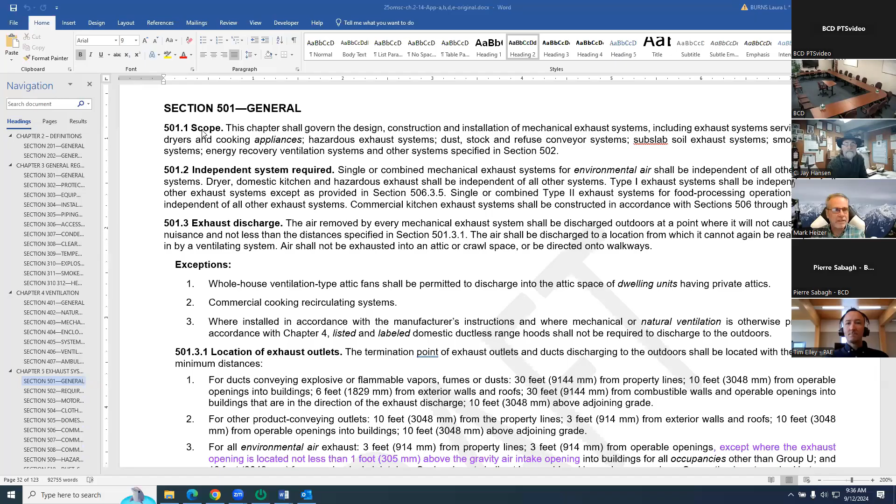Yeah, Mark, and this is Tim here. I was the one that mentioned it.

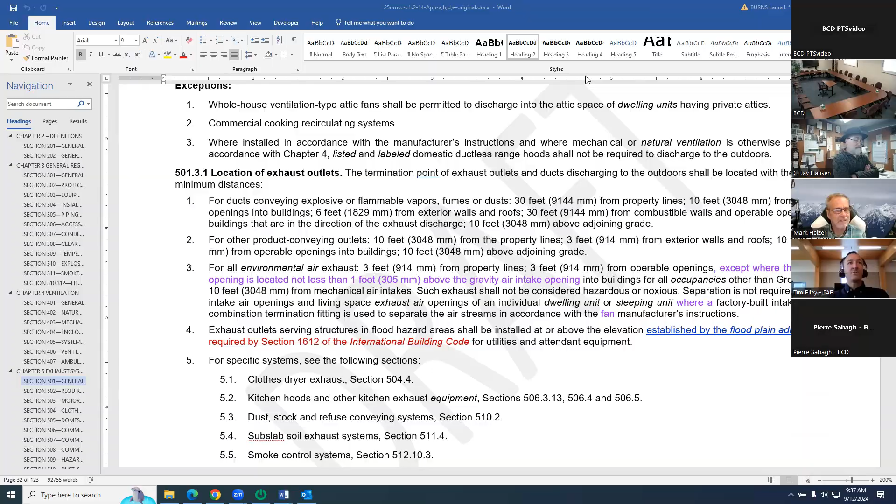I have a kind of a small proposed edit here for consideration. I can either share my screen or tell you what it would be. It's a slight addition to number 3 under 501.3.1. Yes, go for it. Go ahead.

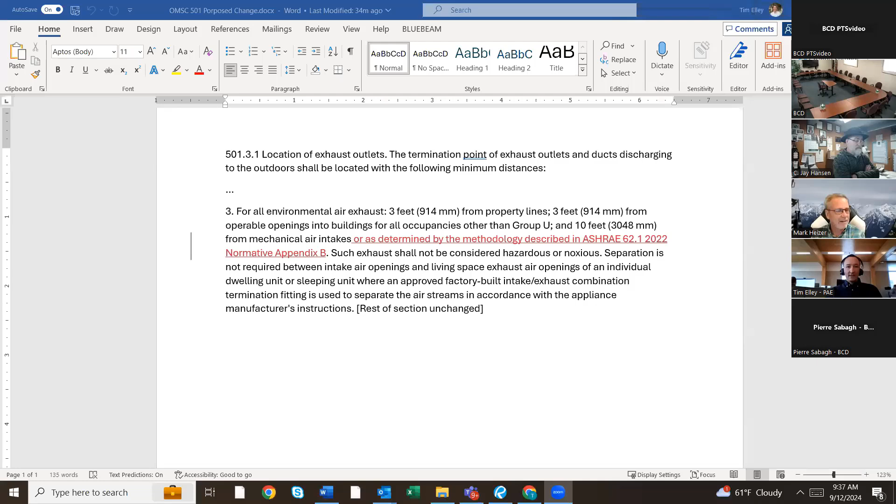So this would be clarifying here for all environmental air exhausts, 3 feet from property lines, 3 feet from operable openings, 10 feet from mechanical air intakes, or as determined by the methodology described in ASHRAE 62.1 2022 normative appendix B, which is a calculation method to determine the separation distance required based on velocity.

So that would apply only to environmental air. But I believe that's generally considered an acceptable alternative method, though it's not called out explicitly. Correct me if you know otherwise.

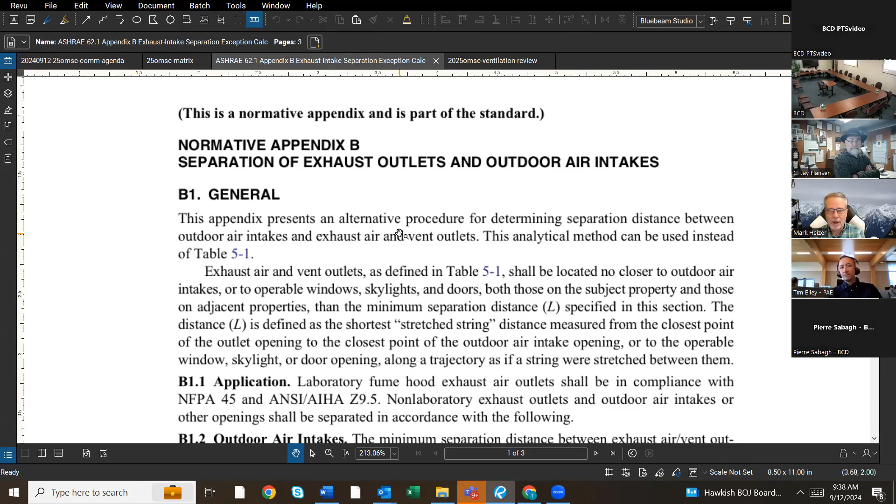And I can share that. It's not called out explicitly, and I'll do a quick word search. So when there are items in chapter 4 specifically related to 62.1, it's only mentioned really once. And so while it's still allowed under, when you get to some of the methodologies, having this noted specifically in code would probably be good - it would show that it's a known accepted methodology, I guess. Having it more specifically noted for this would probably assist.

But leave that up to the committee. Mark, I guess I'd add I don't have strong feelings about it. This is my first code review committee, so I don't consider myself the authority on whether or not things should be called out explicitly, whether and where. But it's something that's come up for me in the past, so thought I'd mention it. But I have no strong feelings, so I'll leave it at that.

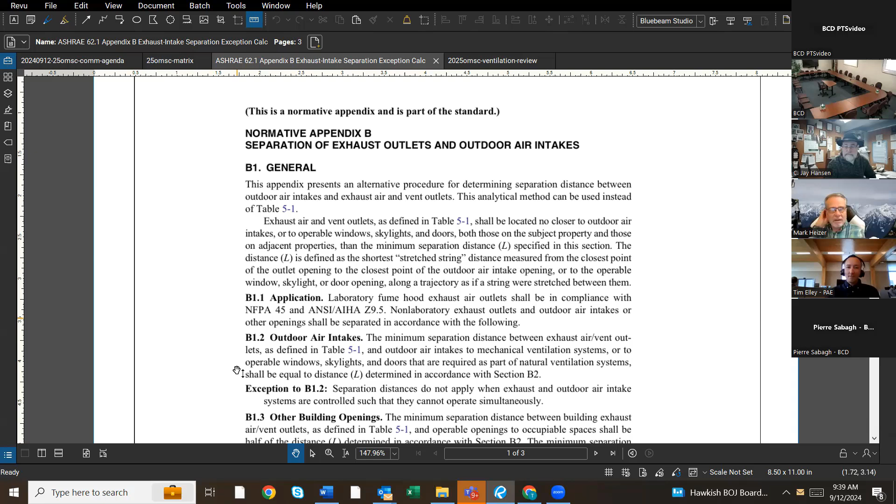In the past, in some past editions for mechanical ventilation, old code would sometimes say under the I-code methodology or the use of 62.1 was always allowed. Indirectly, it's always allowed, but this would, from our standpoint, provide a little extra flexibility without having to go through an appeal process or additional items for doing what is an accepted and well-respected methodology for discharge of, yes again, environmental air.

This could be whether it's just from bathroom exhaust, general ventilation exhaust, residential range hoods, and a few other items considered environmental air. So this wouldn't be any air that's hazardous, and this would allow it to be closer to a mechanical intake.

Especially applicable to multifamily, maybe in cases where you're not literally using the concentric intake and exhaust, but have some other solution. The concentric being the already allowed factory built intake exhaust combination termination fitting.

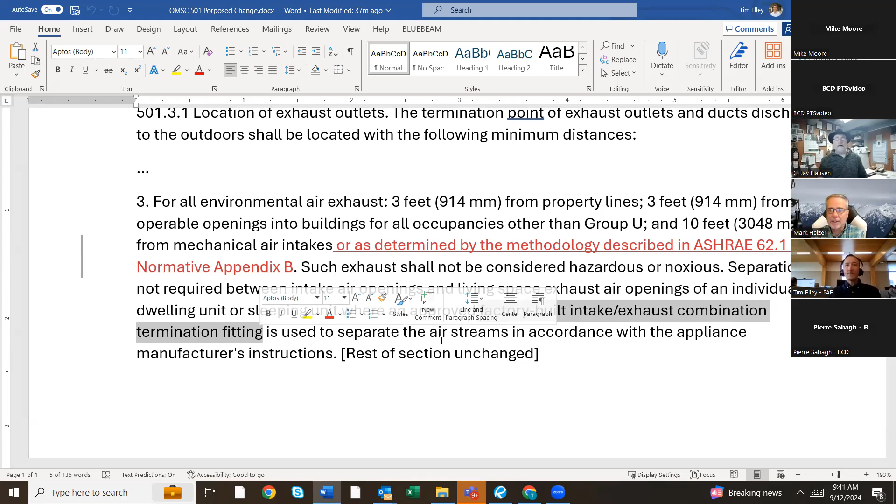Yes, let's go back here to - just as long as there's a definition of it. So environmental air is that conveyed to or from occupied areas through ducts that are not part of the heating or air conditioning system, such as ventilation for human usage, domestic range exhaust, bathroom exhaust, clothes dryer exhaust, and parking garage exhaust. So it's not any of the hazardous materials. It's basically general space air being exhausted or used.

Mark, is it a decision we need to make now, or can it just go down as a proposal and get decided another time? It's up for discussion today. Let's see here, we can get input from committee members.

Let's see here. Kevin? Or Kevin, you're on this, or I'm trying to remember all our committee. Yeah, I'm not on the committee, but I'm on the board. But I just wanted to say, I think Tim's proposal is great.

So we have to be cognizant of time and so forth. But yes, I'm seeing one other comment, and we'll get this through. Then the remainder will need to be from the committee.

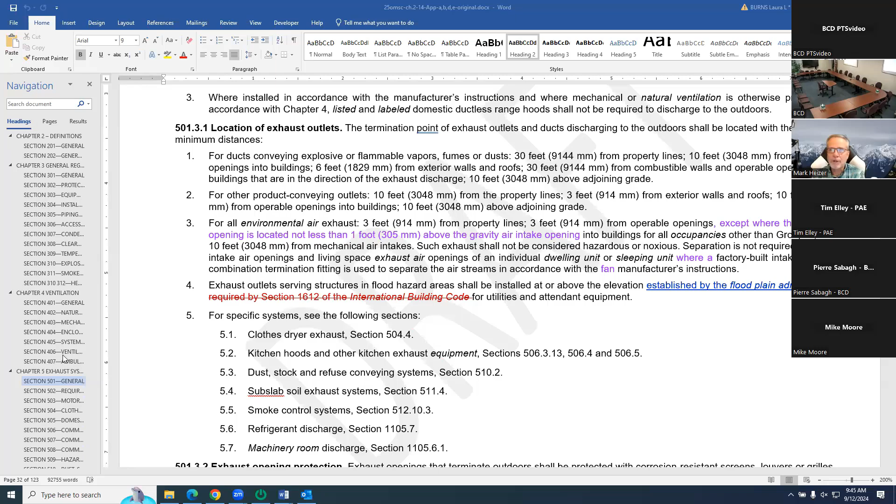Oh okay, we're going back to, as part of our incorporation of the construction provisions of the fire code, the safety items that are required when you have a stove in some of the I occupancies.

So when there's a stove, the basic requirement is that you need a UL 300A type range hood, which has some minimum integrated fire protection in it. It also has the ability to cut power to the cooking appliance.

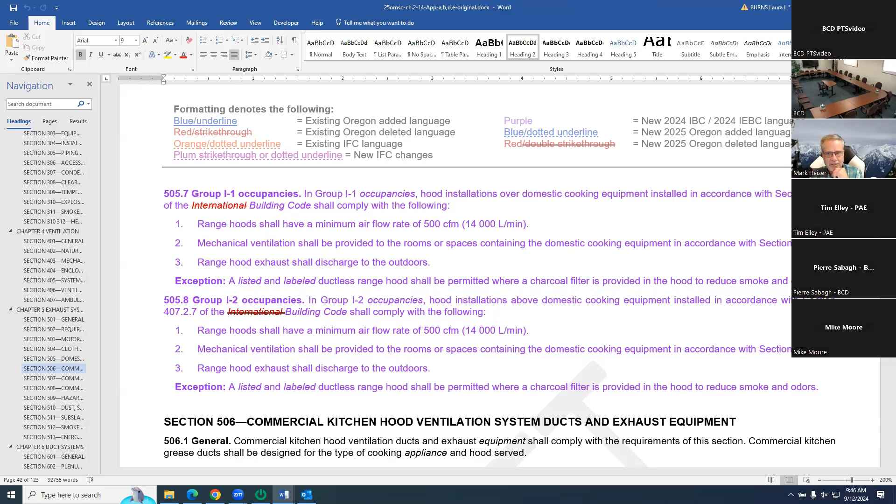This was in the code in the last code cycle and has been effectively for some time. But what we wanted to make sure is the one item in this change where they're being more explicit about it is that the use of range hoods does have a minimum airflow associated with it of 500 CFM.

And just wanted to get one last note from the group that that isn't in the current code, having a specific CFM of exhaust from range hoods in these I occupancies.

And just one more time going through the group, if they're doing this, there's a potential cost increase involved if some of these UL 300A units were under 500 CFM. So it also potentially would have impacts on even more potential makeup air.

Bringing this up for discussion just one last time to say, go forward as in model code with adding this new requirement for a minimum CFM on the unit, and just with a note that there is a fiscal impact. Wanted to allow people a little extra time to mull that one over last week.

Thanks, Mark. I wouldn't say I have any reason to differ from the model code on this one, Mike. So that's my personal opinion. I don't have a reason.

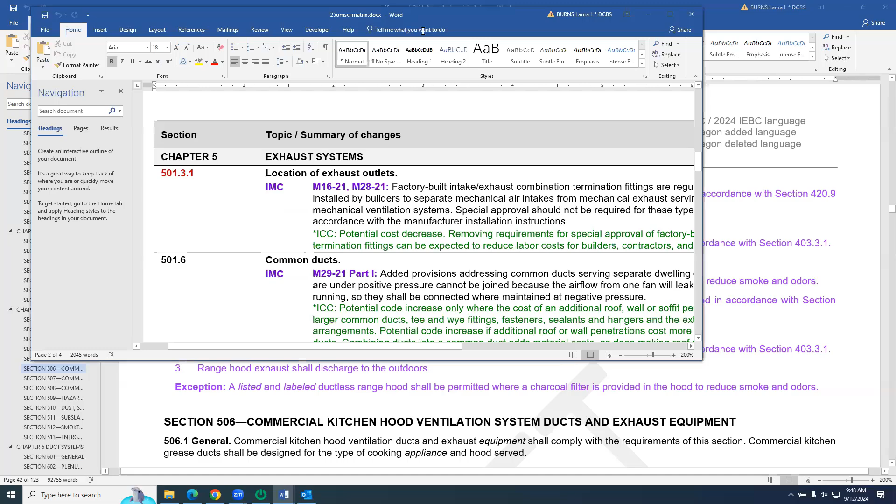Last, going back to our review item, let's get refrigeration piping and shafts out of the way in 11 first, and then we'll go back to ventilation to get that done.

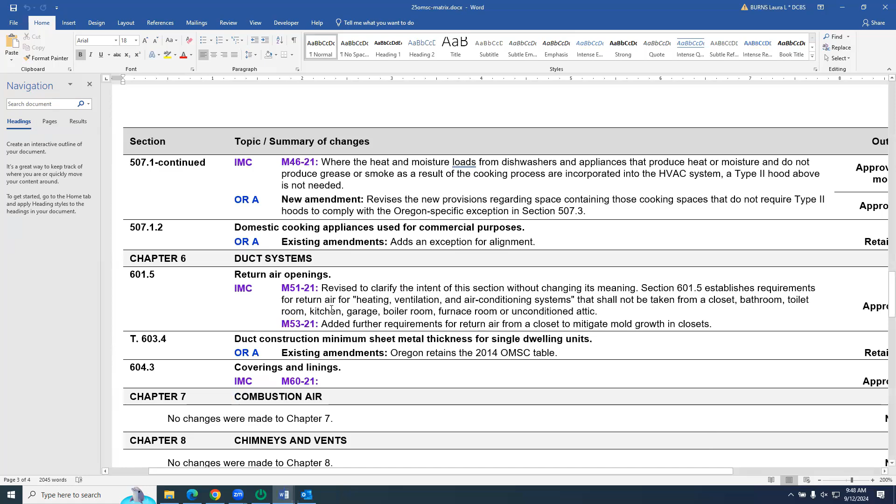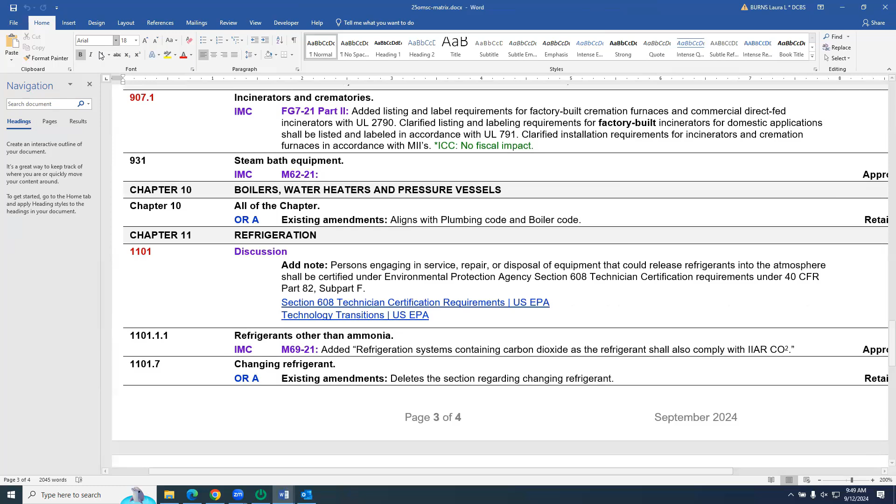Okay, let's go to... Oh, excuse me, the 11 is not the refrigeration and shafts. It's the new informative note that we're putting in, just to run this by everyone.

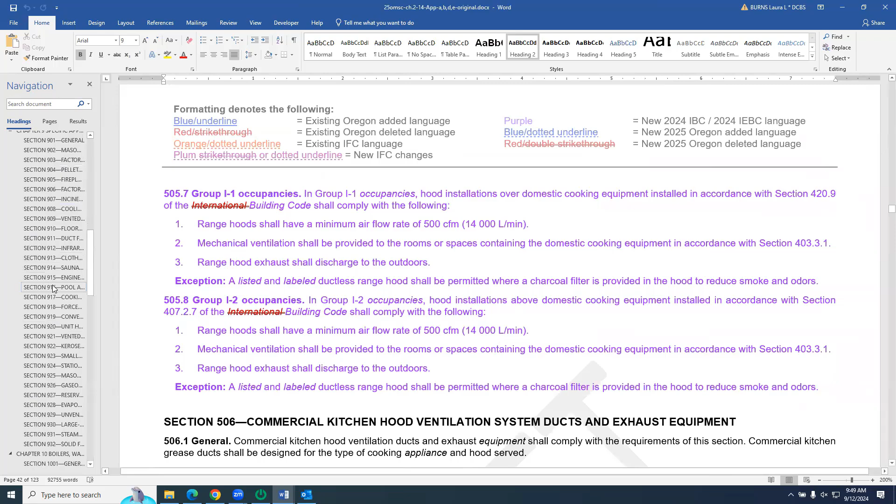I want to show, to remind people of what an informative note is, that we do have when other regulations might be applicable to the code, they're set by other people.

We wanted to note that there are requirements for refrigeration repair technicians that are outside the code, but it's sort of noting some of these environmental issues that are out there. We make notes about DEQ requirements, Oregon and federal DEQ requirements for wood stoves.

Just felt that letting people know that we're going to have this informative note and get feedback about service technicians, especially now that we're seeing a lot of work on changing the refrigerants that are required. Just note this is not code, but a recognition and informative that service techs need the EPA certs for doing work. And just want to get a little feedback, especially from the contractors in the group.

This is something that the division normally puts in, but just bringing it out for awareness to the group.

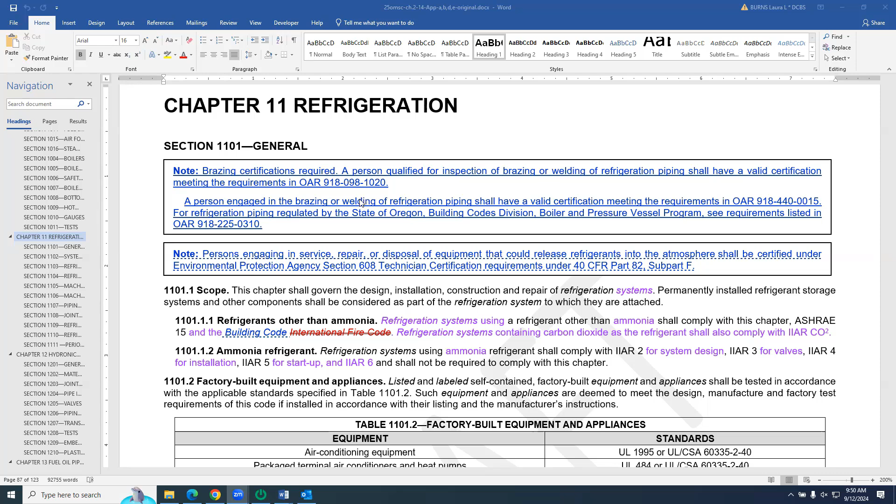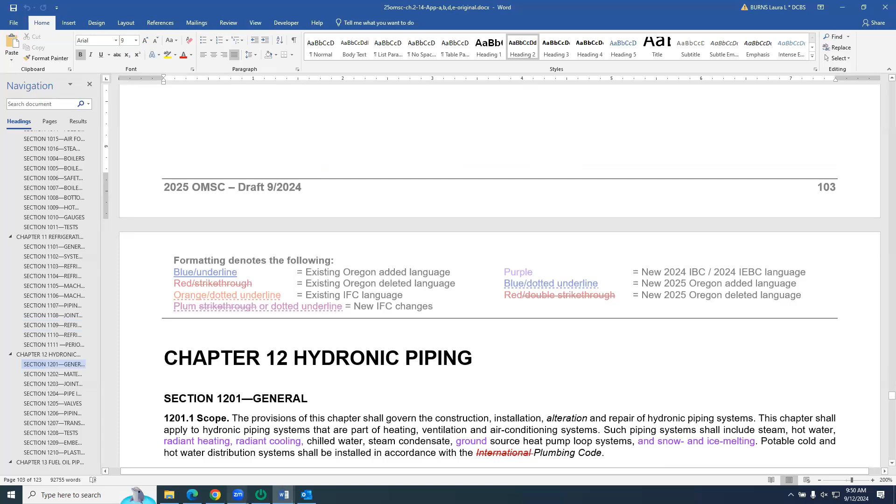And since we did have on here about refrigerant piping and shafts, I believe that was approved last time, but for some reason I had a note about that to continue to note and actually show the language change that's being put forward, which is, and we had that. You showed the strikeout just a second ago.

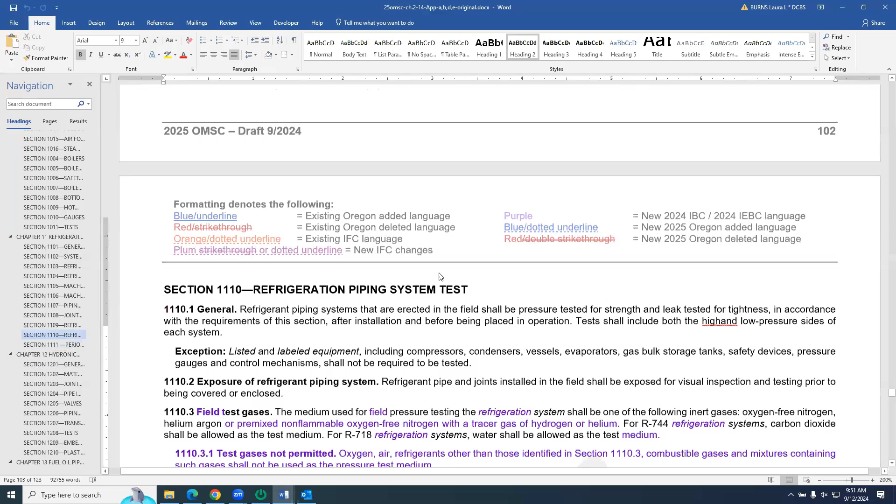This was a recommendation in 1109.2.5, and it is catching up with what is in the ASHRAE refrigeration standard and is going to go into the 2027 code.

Striking out, as we see in exception number 2 here, using group A1 refrigerant. Any refrigerant that is above the MAQ limits and requiring refrigeration will need the...

Doesn't need to be in a shaft, and actually could be a 1 hour or even a 2 hour shaft. So if the piping is allowed to be in the building, and is in a safe quantity to where it doesn't present a hazard and fall under the maximum limits under the tables, this is just noting that.

Unfortunately, because of all the new refrigerants coming out, limiting that exception just to A1 refrigerants was going to be a big cost impact unless that was modified. Just putting that forward to the group to let you know about, and to actually show what the language would look like in our code and will look like in the 2027 IMC.

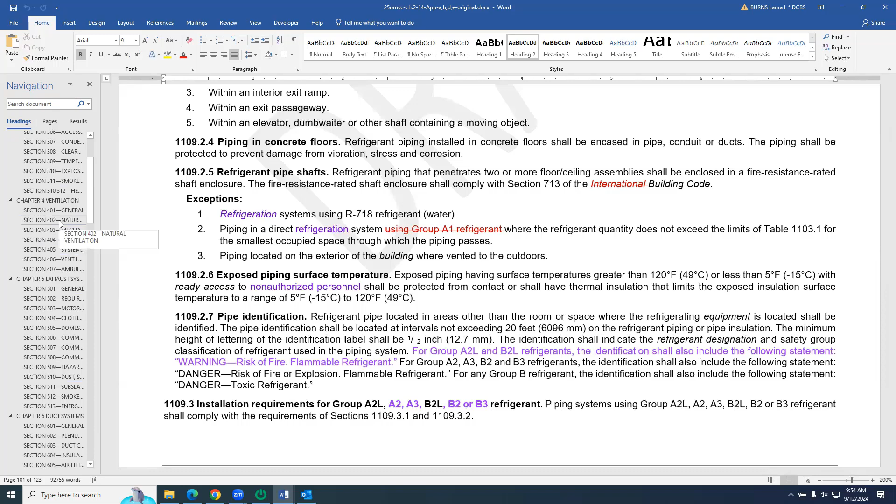So beginning with 401.2, previously, model code language says, if you're complying with the energy code and the leakage requirements, which we require, dwelling units are required to have mechanical ventilation in accordance with section 403. That's sort of our starting point.

That's just clarifying to standard to align with code language. What we need to do is go to 403.1 and show some of the model code changes, and one that was missed in the public document that we'll go through. But if we can go down to 403.1.

Oh, Laura, are you looking for me to talk about also the exception here? We had published, while we're in 401.2, the exception that's being shown here about the way the language worked for the differences between what's in...

403.2 dwelling units under 4 stories and dwelling units above 4 stories. We wanted to make sure that no one got out of having to actually ventilate a shower or bathtub room in a private dwelling. There was actually potentially an out the way our code was currently written. So that's the reason for the red line. You see they're deleting that exception. There's no need to have that in this code cycle.

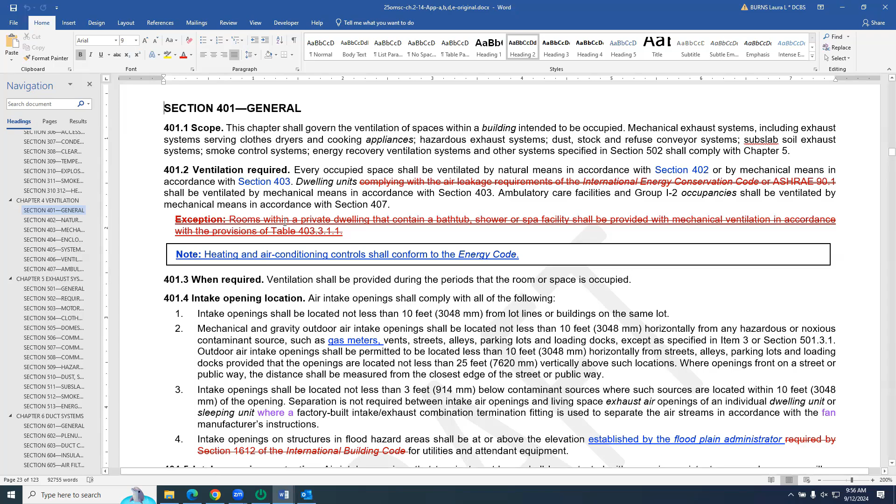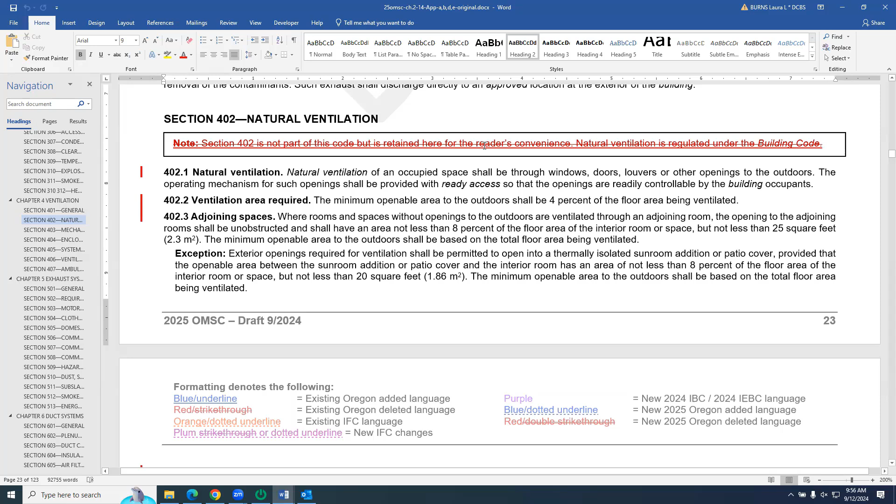So we will go down to, also, we're here that, quote, natural ventilation, as we had noted earlier, has been brought in to the mechanical code. The folks at the building code side said, look, just put all ventilation, whether natural or mechanical, over in the mechanical code instead of having it in different locations. They're recognizing that decisions will all be made over here by the mechanical design team. So that's why the informative note was struck.

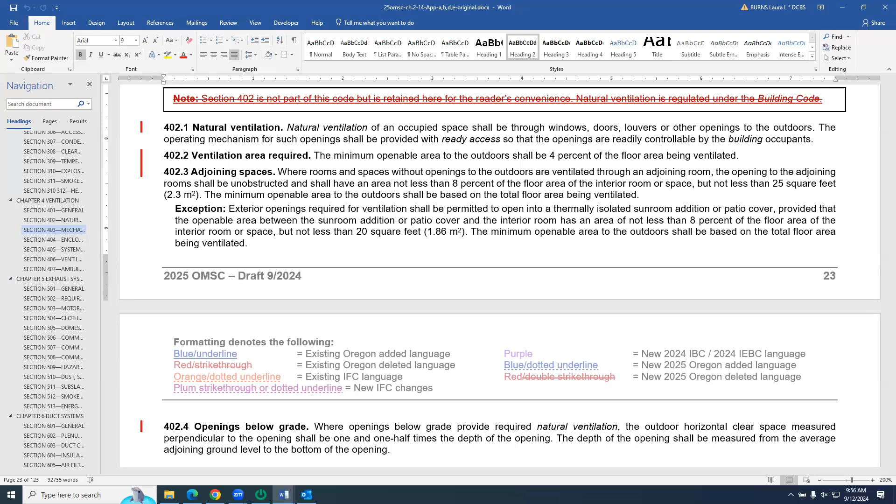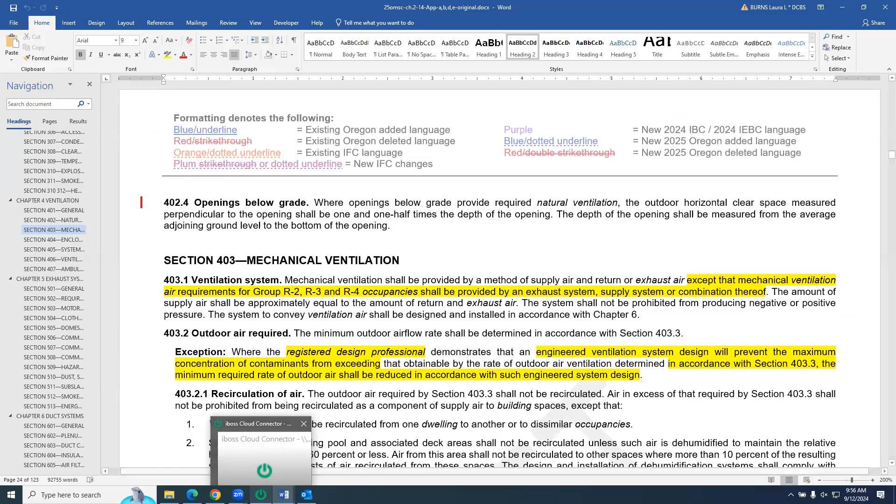Let's come down here. Mark, do you want to go over, I sent all of the committee members the document. Yeah, so we have sent out just some general guidelines for discussion of what is going on, what's changed, what's happening at national level, local level, the things that we've done here in Oregon for our discussion today. I don't know if everybody's had a chance to look at it or not. I'm bringing up my copy.

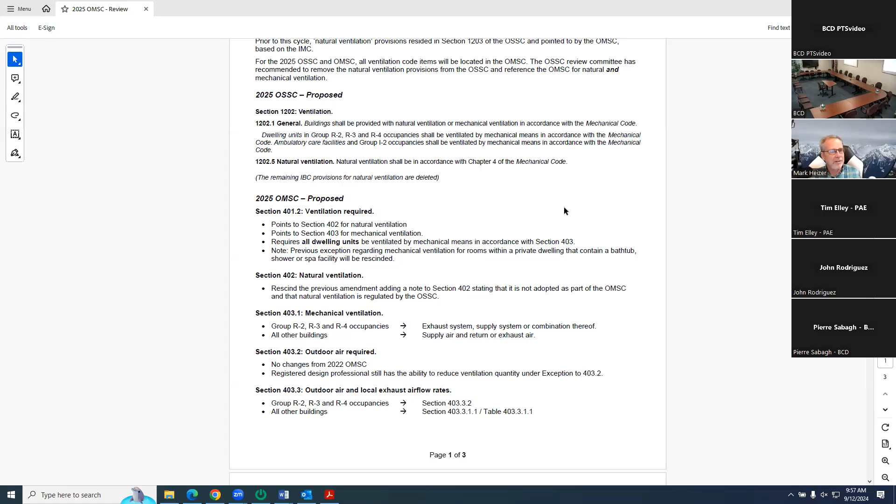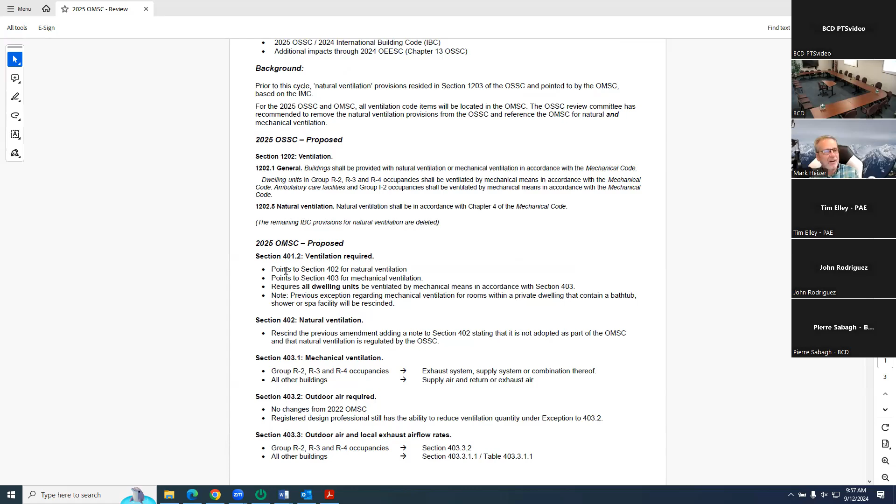There were a list of general questions for everyone to potentially go through, looking at the, yeah, here it is. Laura brought it up. Thank you for first showing what happened at the model code, or excuse me, at the building code side of moving natural ventilation over to...

1202 is being moved to where natural ventilation is being done over, so natural and mechanical ventilation are all being done by the mechanical code. So that is what the Oregon Structural Specialty Code has done, also noting that dwelling units in R2, 3, and 4 occupancies need to be ventilated by mechanical means. And that ambulatory facilities and I2 occupancies need to be mechanically ventilated as well in accordance with the mechanical code. So they're clarifying on their side that they need to know who does what ventilation, where, and how.

So moving over to our code, we're going down through the list, section 401.2, ventilation required.

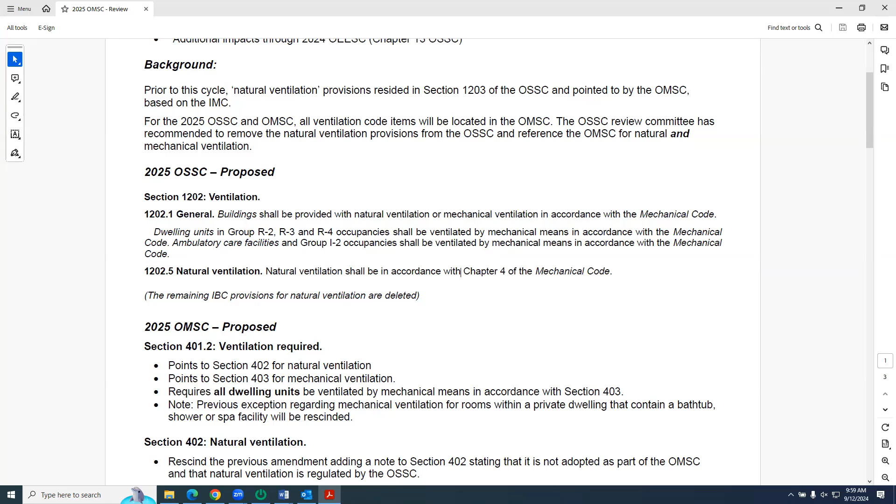402 is now officially in the mechanical code once again about natural ventilation, no modifications to that section. 403 is for mechanical ventilation, and it requires that all dwelling units are ventilated by mechanical means in accordance with section 403. We're getting rid of our exception pointing out that bathrooms have to be ventilated. That's now covered between the tables.

Section 402, we're rescinding that previous amendment that said the mechanical code didn't cover natural ventilation. It is now in the mechanical code. Then in 403.1, we're going through R2, R3, and 4 occupancies. Exhaust ventilation, supply, system, or combination thereof is allowed under model code and has been in our code.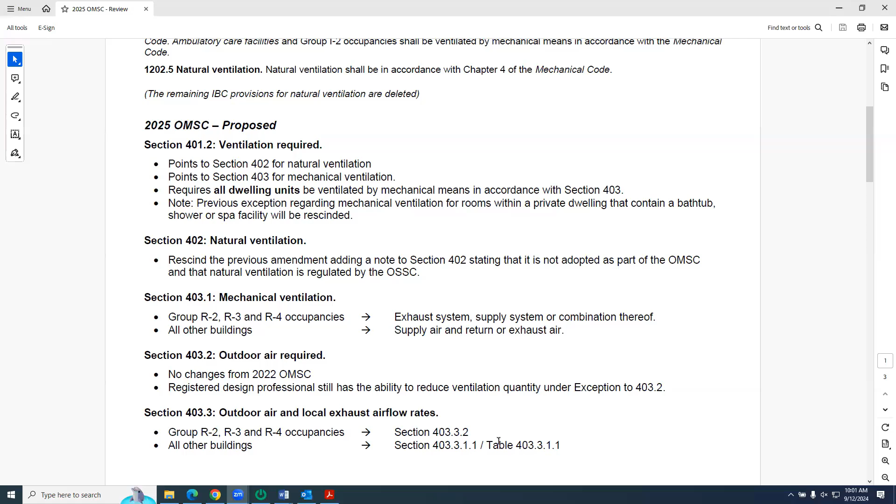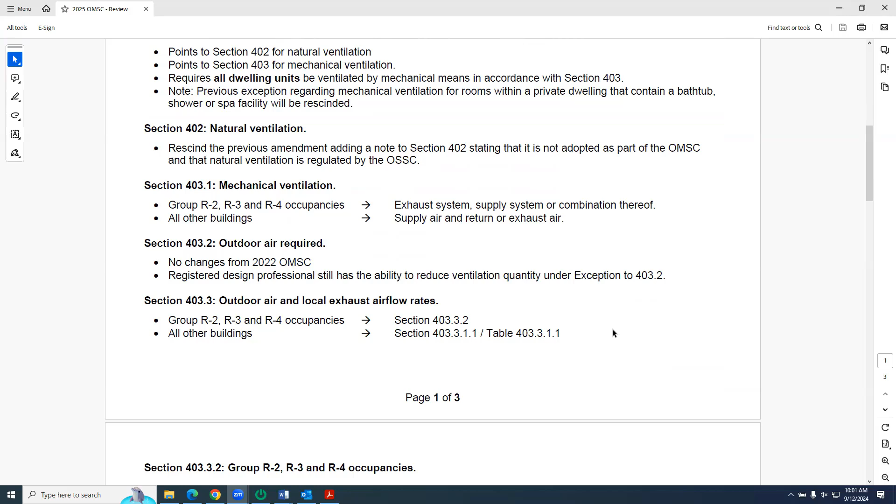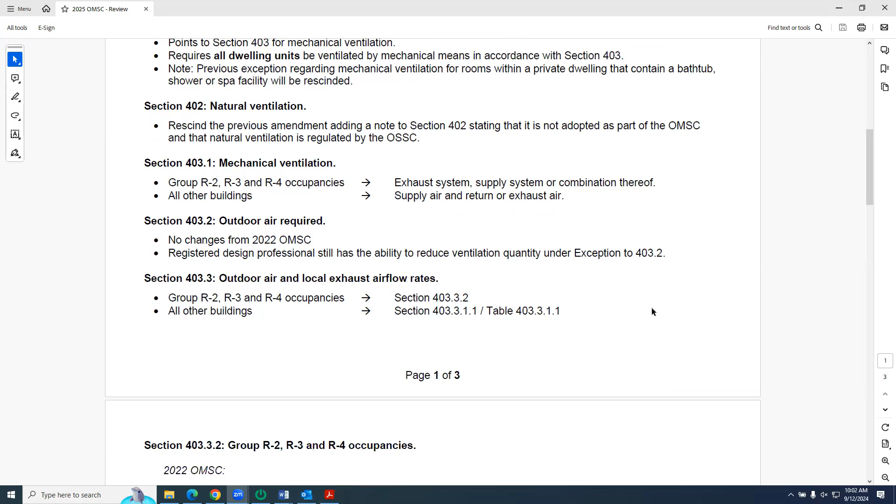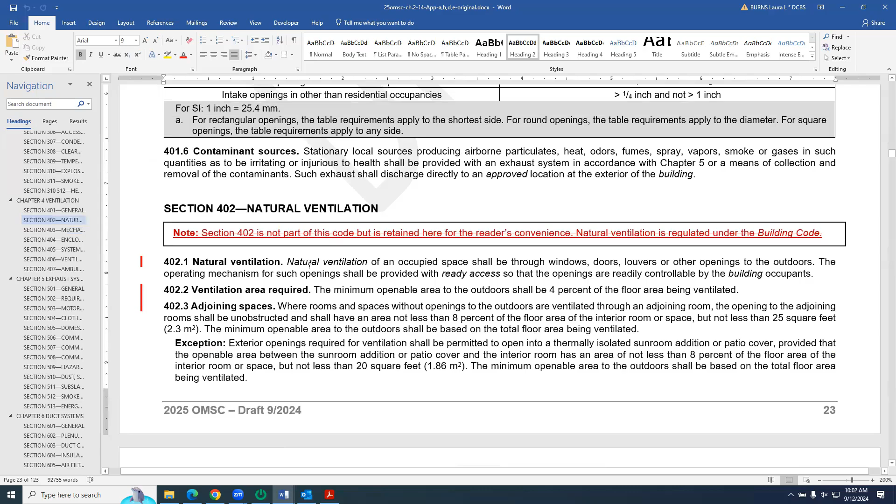If you're in other buildings, you're using 403.3.1.1, and the complexity when you get into multi-zone systems and the like. But dwelling units, really, if you're an apartment or condominium, or if you're a dwelling unit, you are in this section 403.3.2, and then we'll go over the Oregon changes on that and discuss what happened at model code as well with this modification. This is simplifying application. The good part is it's simplifying the application for any dwelling unit in those occupancies. You're not going to a different methodology when you're in a high-rise building versus 3 stories or 2 stories of residential over 1 story of commercial. So it makes it a lot easier to work on that.

So under 403.3 at model code language, they fixed the strikeout of Group R2, R3, and you see 403.3, Group R2, 3, and 4 occupancies, 3 stories and less in height above grade plane has been struck. This will now be for all of those. You go to section 403.3.2. That will be errata. It should be errata in the IMC when they come out with it, because they didn't like that in 403.3. So let's go to

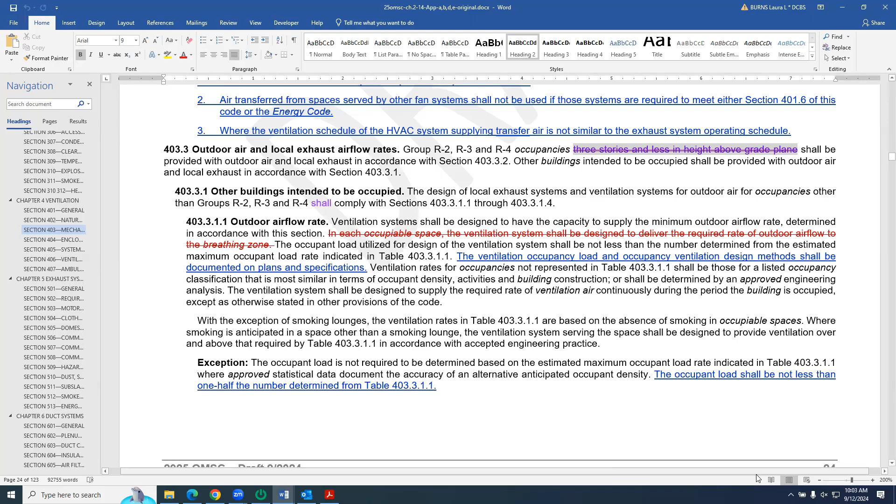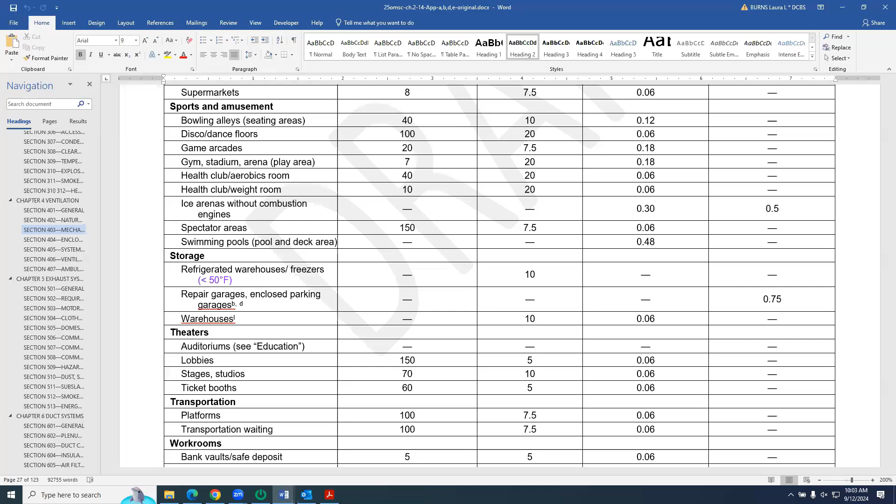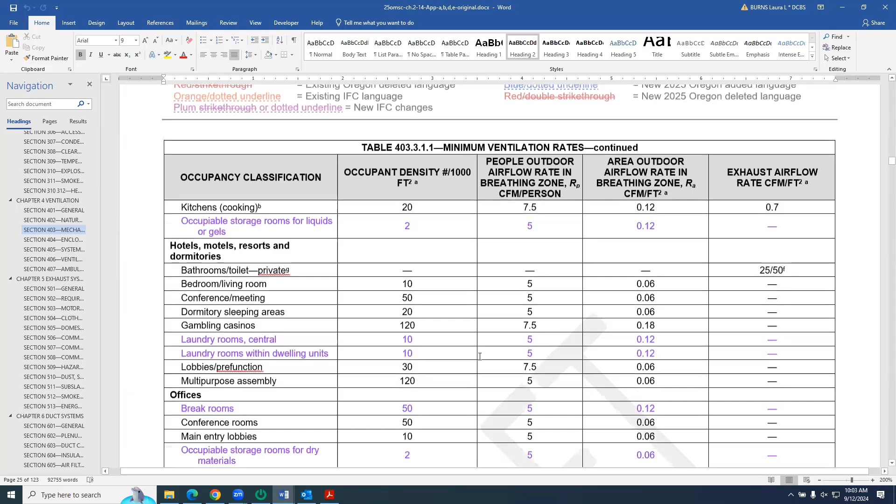403.3.2 to go over both Oregon amendments, but real quick before we get there, let's go back up in the table. What is in our current table to explain some other items we're looking at - let's scroll down until we find a stop. Whoa. Back up just a little more. A little more. Here we go. Private dwellings and single and multiple.

This used to be for all things 3 stories and higher. What we do in our code is, and what will remain, sometimes there may be a private dwelling in something that isn't in those occupancies. They sometimes have a small apartment or dwelling at a storage facility or something like this. We'll make sure that there is alignment sort of with model code, and making sure that the Oregon amendments stay in place.

If we look at private dwelling, single and multiple, under kitchens, Oregon has had 150 CFM as the minimum for kitchens. We're going to maintain that for when it's intermittent operation of a kitchen. Another item is, of course, under toilets and bathrooms, Oregon has gone from 50 CFM to 80 CFM if there's intermittent operation. And we also, oops, can we go back to that?

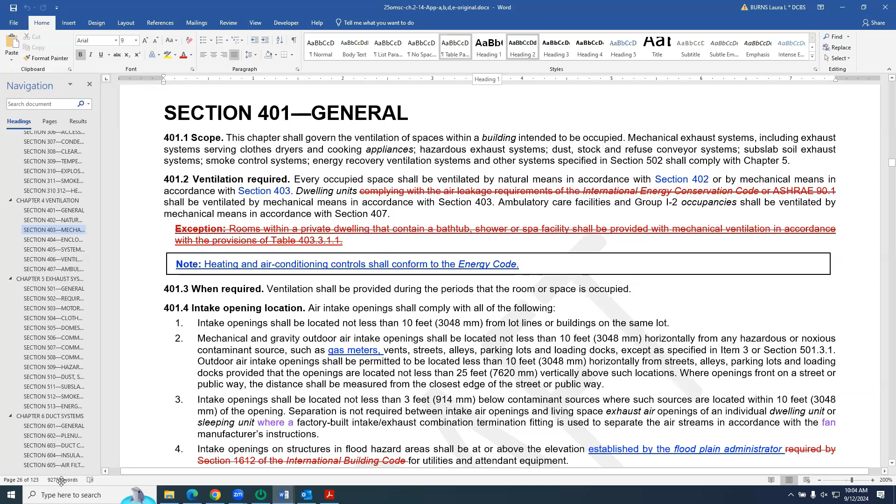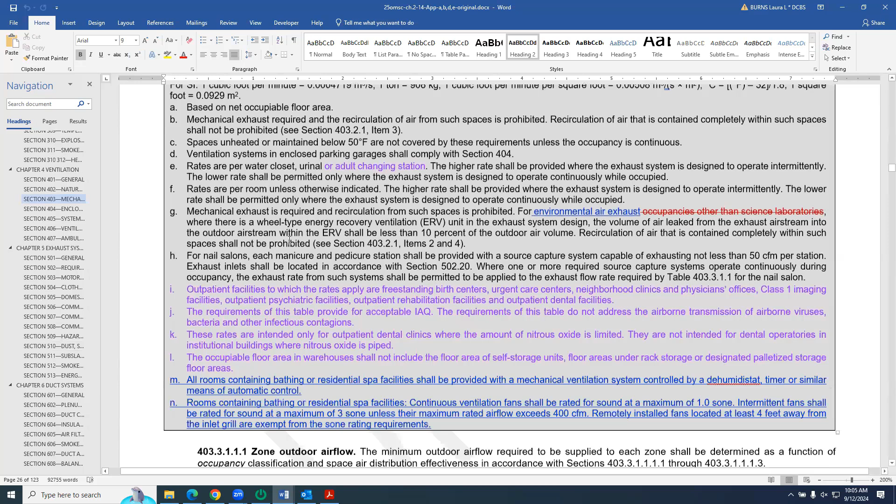Because I want to show the footnotes here, because that explains a little more on this. There is a footnote in Oregon for toilets and bathrooms, footnotes G, M, and N. G is, of course, noting about just environmental air. M is an existing change that applies an existing Oregon amendment in this table that aligns with our residential code, that all rooms containing bathing or spa facilities shall be provided with a mechanical ventilation system controlled by a dehumidistat, timer, or similar automatic control. And we need to do - and then it says, and then we have the note about sound for intermittent operation.

We do need to, and I noticed this, Laura, that we need to clarify that if it's intermittent operation, it needs to be controlled. That's the intent of footnote M. Oh, okay, so you want me to add that here as... Yes, well, I forgot to get that in there.

At the very end of the sentence, let's just put 'as with a dehumidistat, timer, or similar means of automatic control for when intermittent operation.'

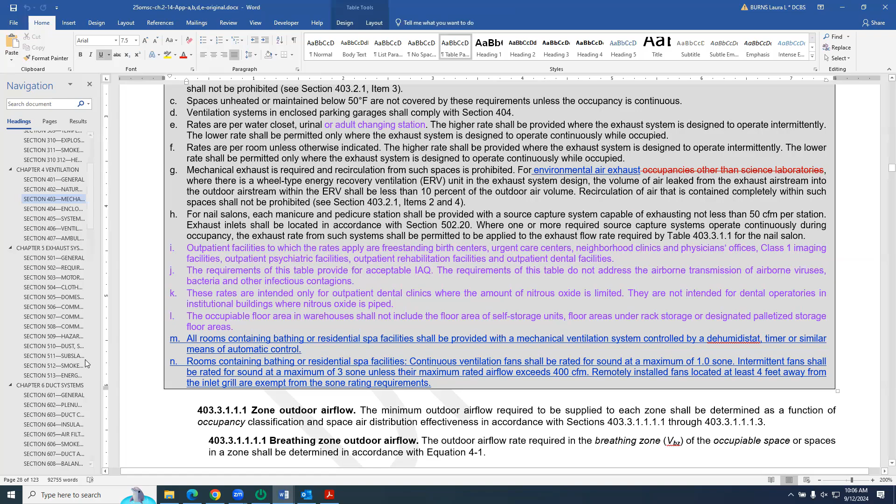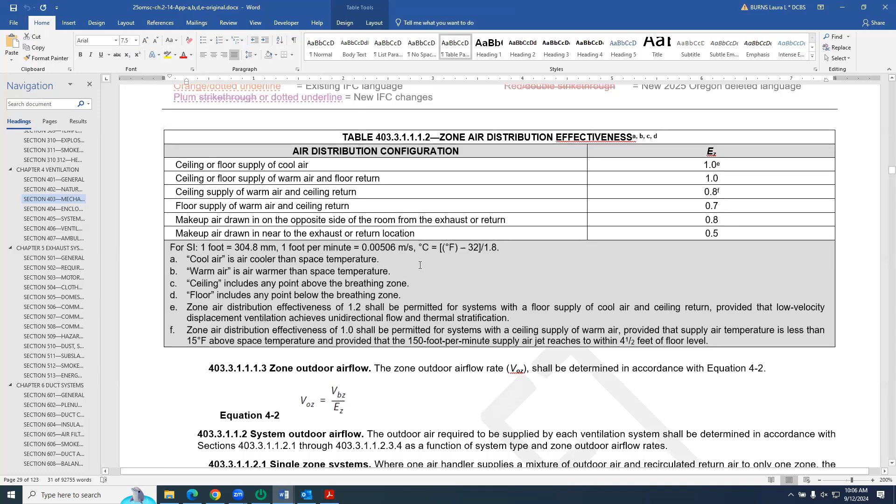Can I just copy that other one that we did? Okay, yeah, we can copy the other one. It's facilities with intermittent exhaust shall be provided. That's what we came up with. We're looking to make sure that this requirement, which is in the residential code and is currently for 4-story and higher, that it is only applying to intermittent fans. We don't want fans that are running continuously to potentially be on a time clock or other automatic control that would shut it off. This is intended for, just like in the residential code, for those fans.

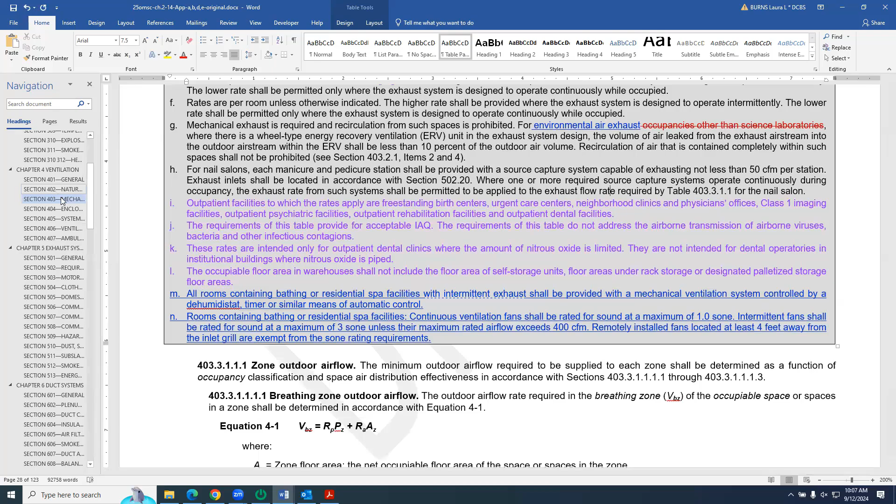So those were the notes I wanted to point out there. Let's go down to 4033 now, or 40332, and the model code changes that are here. One thing that I believe this was where,

Yeah, we have made sure in one of the locations where there's talk about R2, 3, and 4 occupancies, 3 stories and less, all of those have been stricken to make sure that this section here for the ventilation for dwelling units is per code. We do have the modifications similar to that have been in code for some time, that it is an 80 CFM bathroom fan if it's intermittent. It is 150 CFM if it's direct vented, or excuse me, for a kitchen fan. These are where Oregon has had a higher requirement than model code. I want to make sure that that is happening as well.

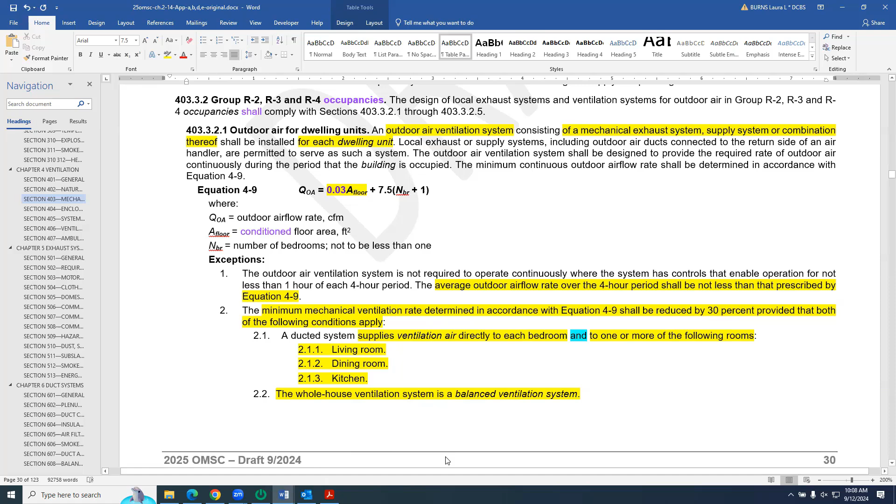And then we're going to point out part of the discussion today. Oh, if we, are you going to stay there, Laura? No, where do you want me to go?

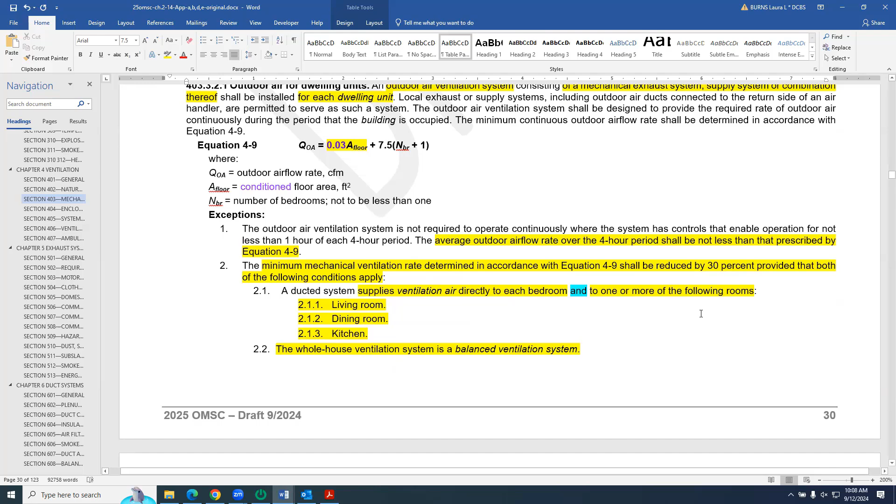Let's scroll down to the ventilation rates, just showing the schedule here is that we do have higher rates for intermittent kitchen range hood exhaust and for bathroom exhaust. It's worked very well for us. It's had great results in Oregon, and we're maintaining that.

We are making sure that, yes, bringing in the requirement for all dwelling units that if it's an intermittent bath fan, have that push button or humidistat or other controls that can allow, which came from the Construction Claims Task Force in 2009, and really was intended for all dwelling units. When this section was put in, it was kind of missed to make sure we had the controlled fans, but this maintains alignment with the residential code.

And so those are the changes. Now, the one item for discussion today is a fairly significant change under equation 4-9. Currently, and for some time, the ventilation rate has been 0.01 times the total CFM required for the mechanical ventilation, if you were going with mechanical ventilation, was 0.01 times the area of the floor plus 7.5 times the number of bedrooms plus 1. So really, if you had a one bedroom apartment, you did 2 times 7.5. That's an additional 15 CFM. The change from 0.01 to 0.03 is a range of 30 to 40, 45% increase in the ventilation rate under this section. And we're asking for a review on this and whether to move this forward, because there is a cost impact on that.

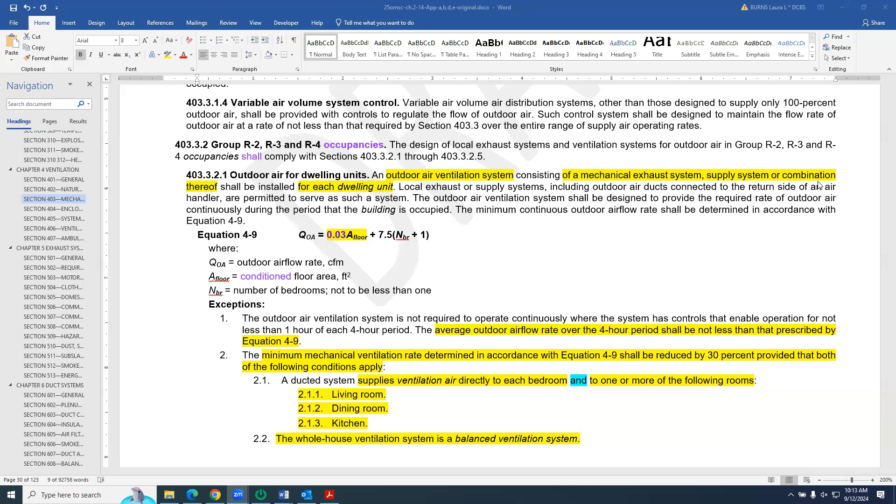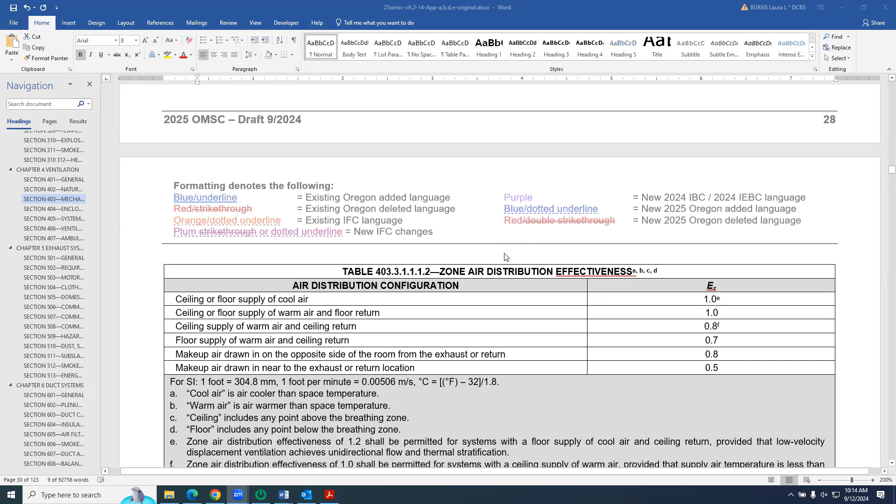The reason it was actually around 0.03 before: if you look at the tables that Mark had referenced previously, in the non-transient dwelling unit space, if you use the ventilation rate table there and calculate the rate for a dwelling unit, it's pretty comparable to the 0.03 you're seeing now.

What happened was, a few code cycles back, I was on 62.2 trying to promulgate 62.2 rates. The problem was, at the time, 62.2 was based on single family dwelling units, or focused on that. So all the rates, the 0.01, were based on that and assumed an infiltration rate associated with air leakage of the building enclosure. There was a credit built into that equation associated with a typical leakage rate.

What happened was 62.2 then recognized that the building code is moving away from that and saying build tighter, and we can no longer assume homes are as leaky as 7 ACH 50. This is especially true of multifamily dwelling units with adjacent units, where you don't want to build in an infiltration rate assumption, because you're likely to be drawing air from the corridor or the unit next door as likely as from outdoors.

So 62.2 moved to say that if you're an attached dwelling unit, we're going to 0.03, which is more in line with where the IMC was originally. And then I had to go back through and correct everything in the IMC to bring things back in line. So the 0.03 is really supported by 62.2 at this point, also by the model code for low rise, and it's akin to what was previously required for low rise and high rise by the IMC prior to parsing out 403.2 into its own section.